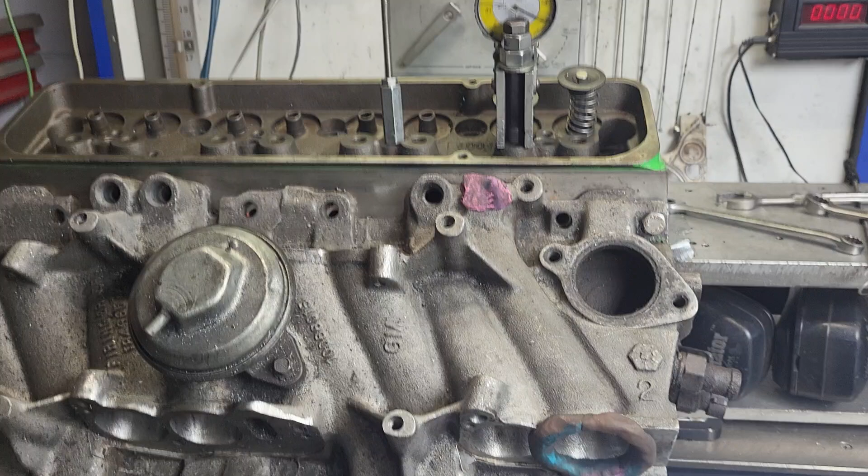All right, guys, as if I don't have enough on my plate, we're going to start a new project.

None of these parts are part of the project. This is actually my old 007 heads that are done up pretty well. They're 2.02/1.60s, fully ported, and pretty much ready to rock and roll.

This is a piece of a TPI project that never made it to fruition. The customer and I agreed on a price to do a set of heads. This base, he gave me two sets of runners, a plenum, and a throttle body, all to work up. I was about 100 hours into the project when he said he needed all his parts back. Oh no, I'm not paying you back then. So that isn't going to happen, that's why I still have the parts.

But I do have a TPI project coming. It's changed quite a bit from where it originally started. It started as a very low mileage '85 Z28, an L98, I think, or an '89, I don't remember.

In any case, TPI engine, 220 horsepower stock, something like that, with the 5.7 in them. He wants it to run way better than stock but pretty much look stock. When you open the hood, he wants it to look stock. I understand where he's coming from.

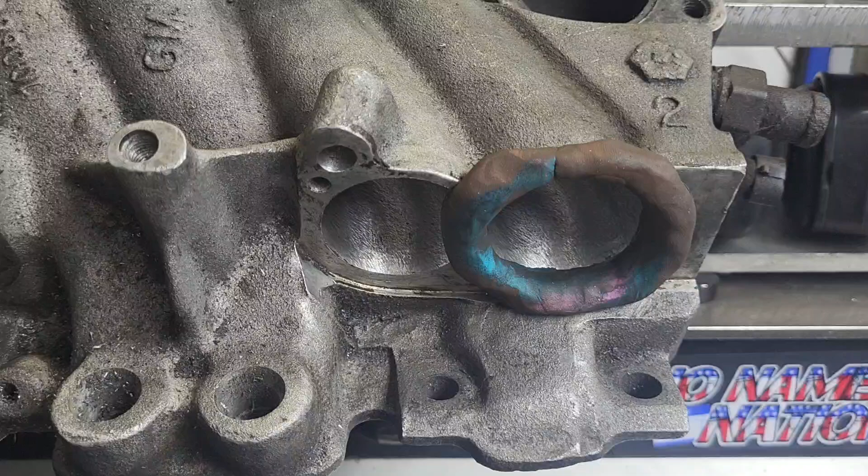And I'm going to show you what I did on this base. Is the base completely done? No. If you want to find out where this originally started, I did an in-depth thread.

Ported 083 cylinder heads, the TPI project. It's on Speed Talk, it's 24 pages deep, and it's pretty high tech. Even towards the end of it, Chad comes in, and he's building a very high horsepower TPI setup, but he's not using the long runners. It's really interesting what he does.

Basically what he does is he takes a set of 113s and he works them up, and he's driving it around, and it's good, but of course, what happens? You want more. So next, he's doing a set of super stock heads for it. Man after my own heart, really.

So without any further ado, let's take a look. What I did is I flowed the head by itself, and then I took this manifold and put the clay on it. The clay does not want to stay - what a pain, because there's not a lot of room. If you take a look at how they're designed, there's not a lot for the clay to bite on. So as soon as they start flowing, the clay gives you a hard time.

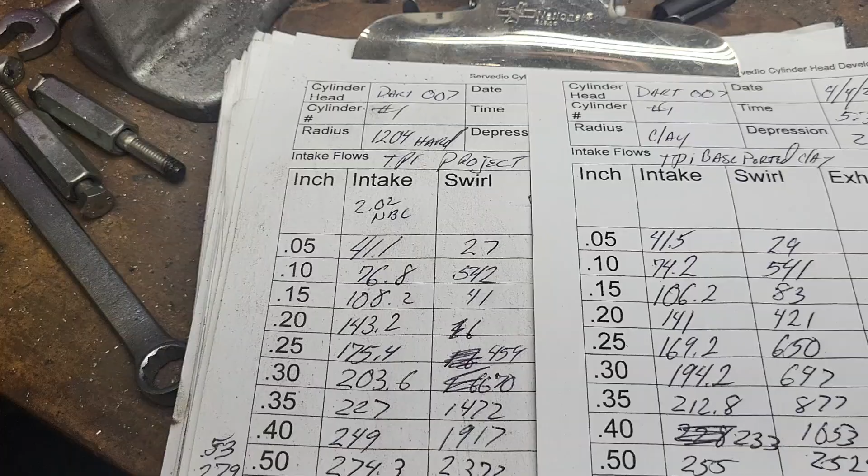Okay, the heads themselves - if you look on some of my very early videos, I did 4 or 5 videos on these Dart 007s. The only one you'd probably be interested in is the finalized one, which is where these guys are right now. They should be pretty similar to these flows.

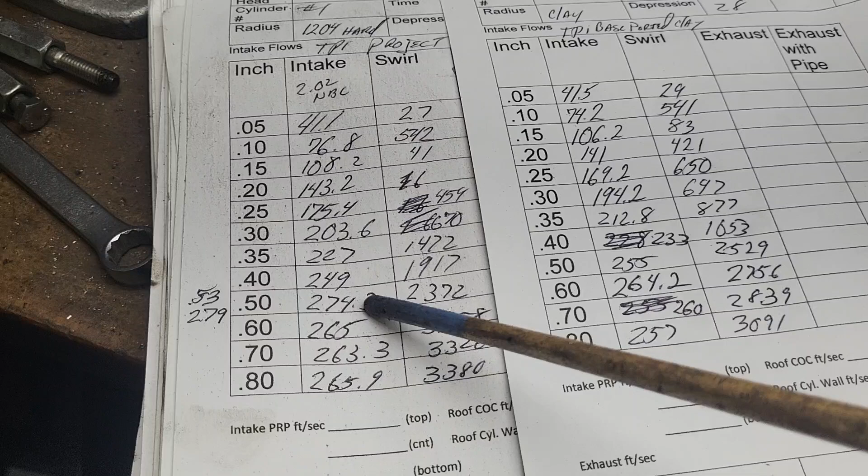In fact, I think it topped out at 274. I fiddled with it a little bit. At 0.53 it's 279. Now I worked on that because I was thinking of putting these on the old work truck. The old work truck has a 0.53 lift cam in it right now.

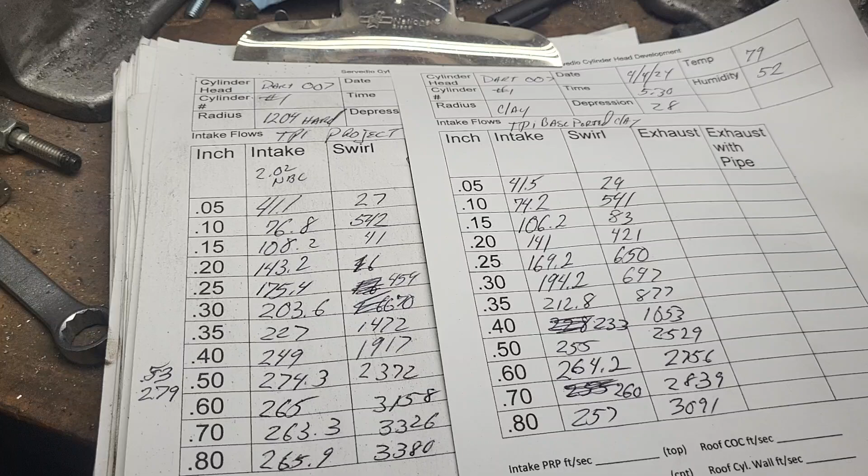So yeah, 280 CFM for a work truck with a 355 is pretty good. The heads that are on it now are 083s. They probably only flow 235 or something like that. They've been on there since the early 90s.

So in any case, we got a decent number at 300. We top out at 274.3 at 500. Right, we got a nice strong swirl curve.

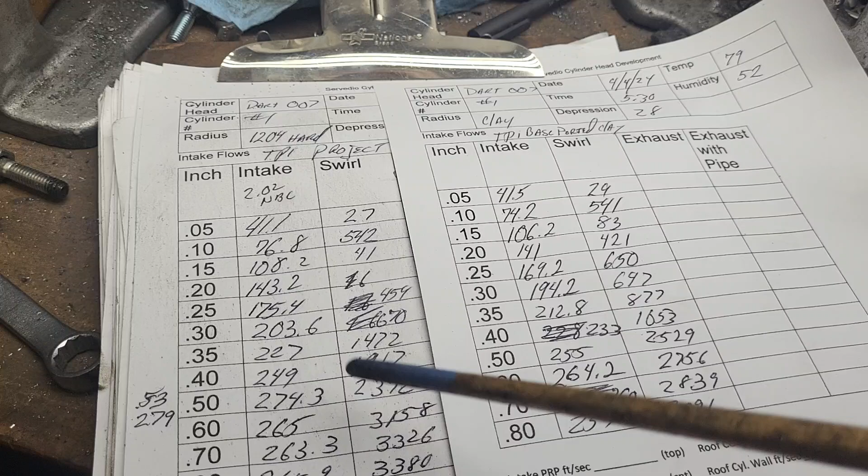Now the TPI engine will probably, depending upon how hot he goes - as it is, he purchased the 007 heads, they're on their way here. He picked up a nice base, I forget which one he told me he was getting, we'll see it soon enough. And he called my buddy Mark Vortec Pro about doing a short block.

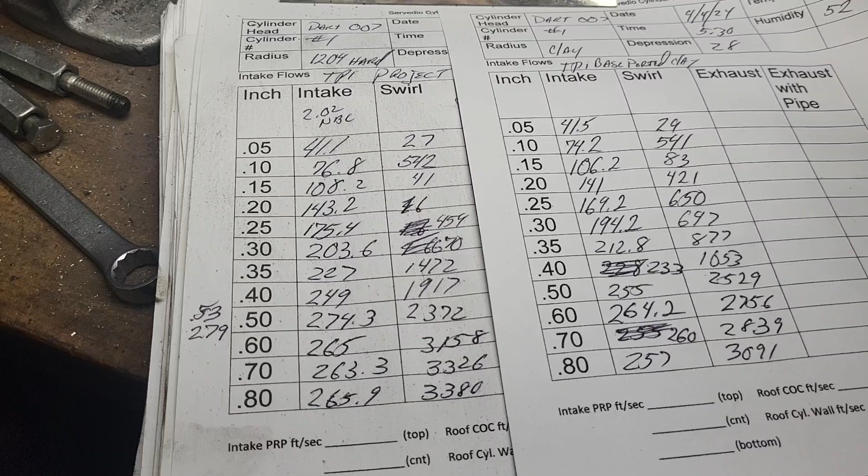So it may get boosted up with some cubes, which would be a huge help, make it a real torque monster. In any case, by the time we're all said and done, the thing's going to want to kill him every time he touches the gas, pretty much. Going to be tough to keep it out of the ditches. But that's half the fun, right guys?

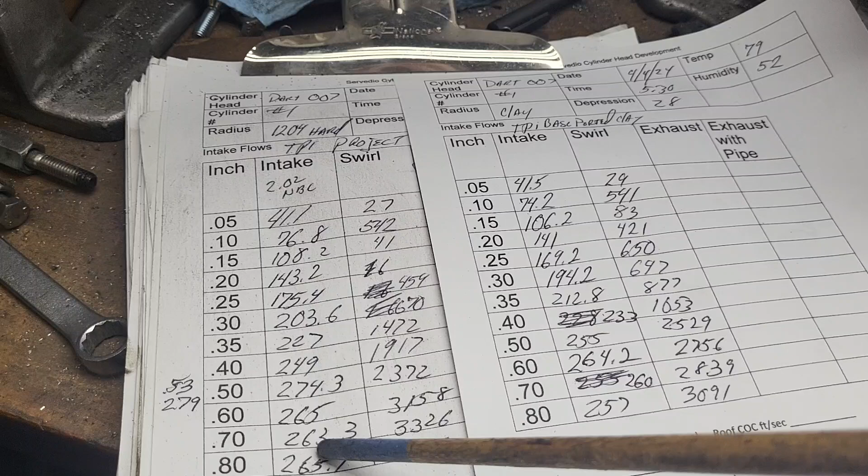Okay, so we did good as far as our existing flows. It was a 202 with no back cut - why? Because that's the first valve I found. The ones from the earlier videos had a back cut, so they're going to be a little bit higher in the lower lift ranges. Okay, so what happened when I put the base on?

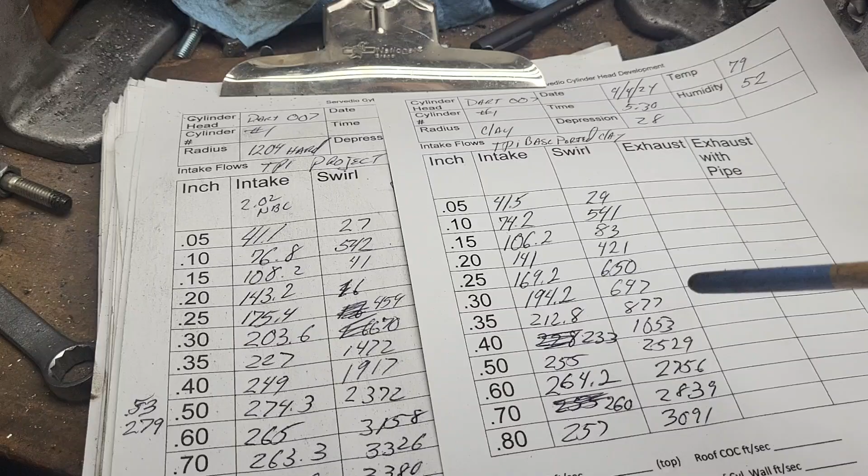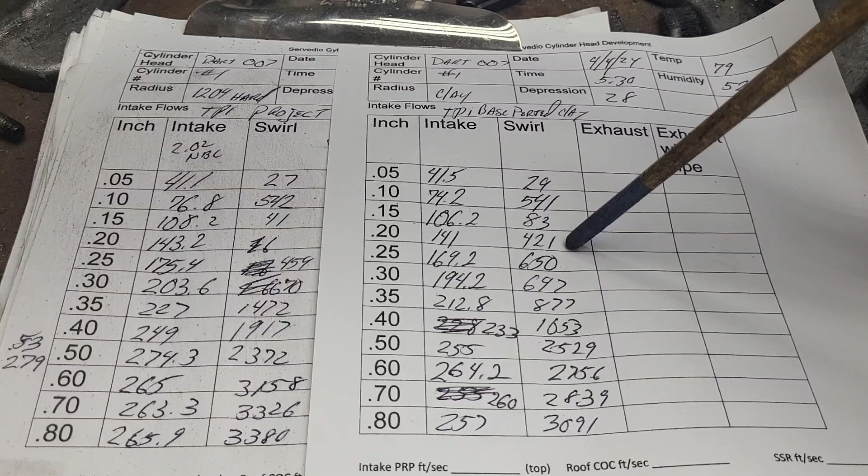Now I don't remember getting more than like 235 out of this base, but my memory is not perfect. And the 083s were only about, I think I was getting around 260 out of them. So these flow a little bit more.

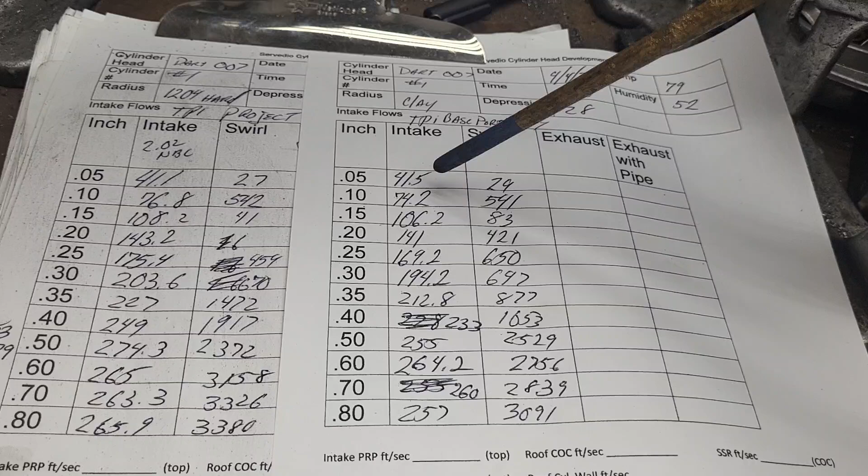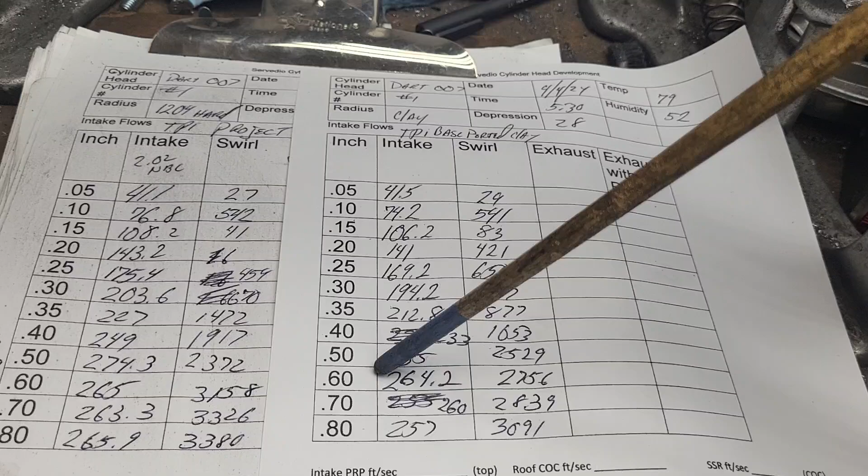And this is what we got as far as the base. We actually got a tiny plus at the very lowest lift, and it holds on pretty good. I mean, it's really not bad until about 400, and she starts taking a beating. But still, if that was our only restriction, we would be doing pretty good. We would definitely make some power out of that.

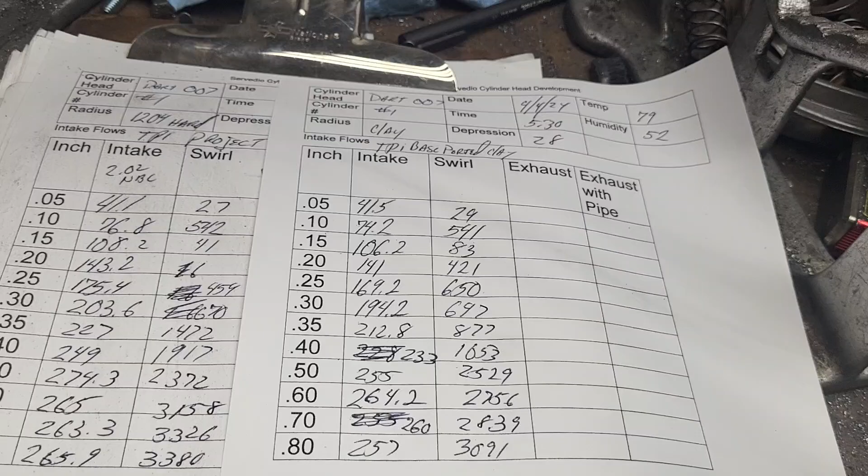Now what we're going to do from this point on, the next video I'll make, I'm going to add on the runners to these. Now I have two sets of runners - I have SLP runners that I cut in half, sectioned and ported, and I have a set of stockers. The SLPs, you would think, trounce the stockers, but that is not the case. So we'll do that, but that's not going to be today.

I think I'm going to pop these off and give you guys a quick look at the intake and the head.

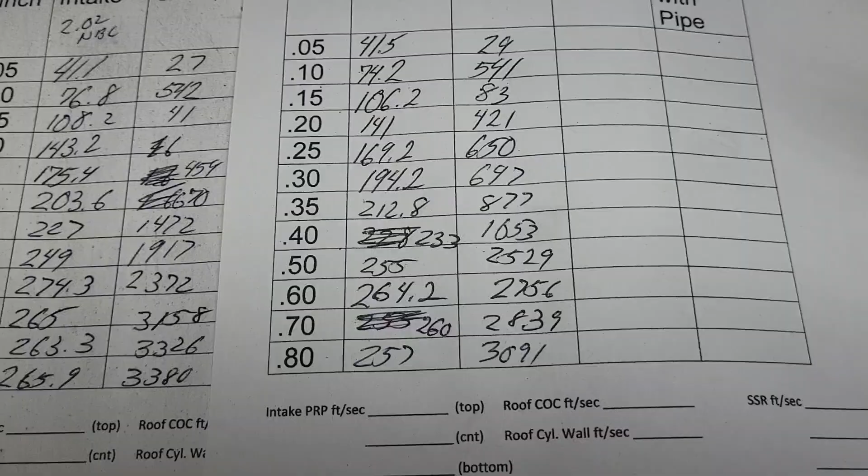You know what we should do? We should discuss the swirl. Okay, go back and forth a little bit.

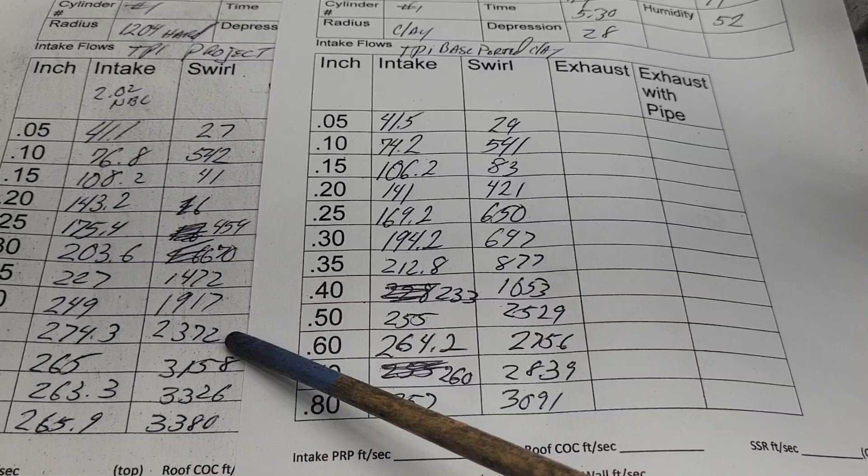Yeah, the base does, it knocks us down in this area, but it actually - you got a plus there, you got a minus there, you got a minus there, you got a minus there.

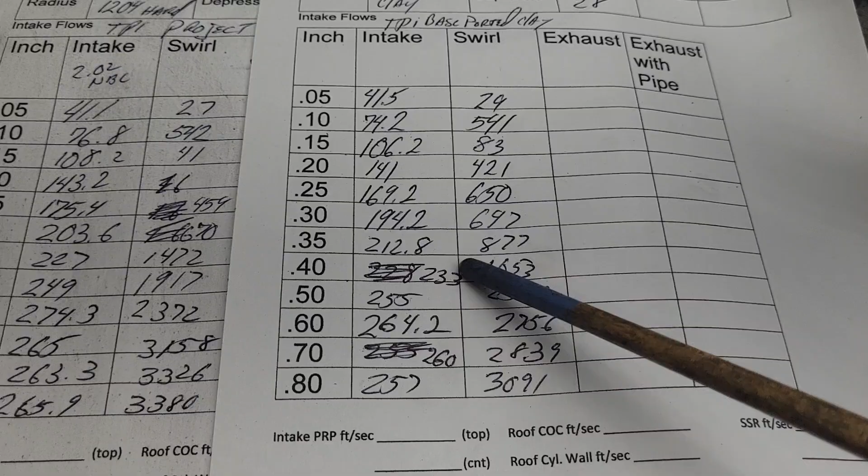So what's interesting about these is, in reality, what they did is they took the - I don't know exactly what year they came out, let's say 69 DZ 302 cross ram. It was originally made by Offenhauser, I think. They took that design, but they added on these long runners and made it port fuel injected, okay? But it's got the same type of curved runners, right? These curves are relatively steep, okay.

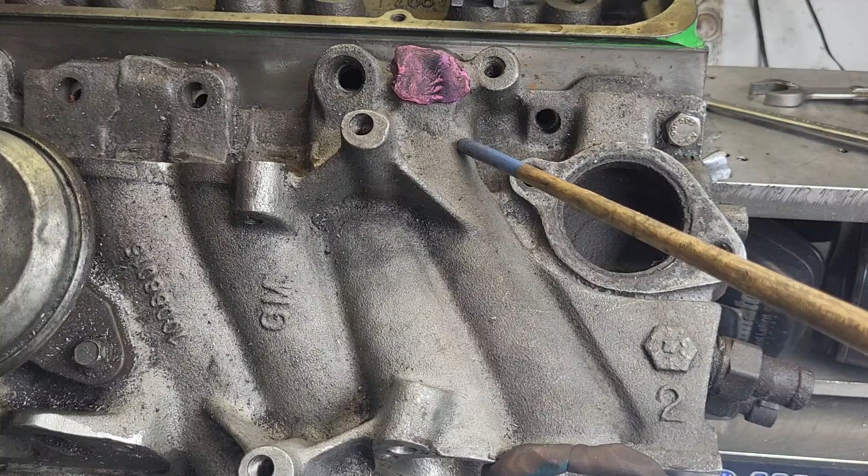So I remember my pitot was long enough to get almost all the way down to the end, and these are high speed right about here. Okay, so we can give it some more area there and calm it down a little bit. But we'll see how that goes.

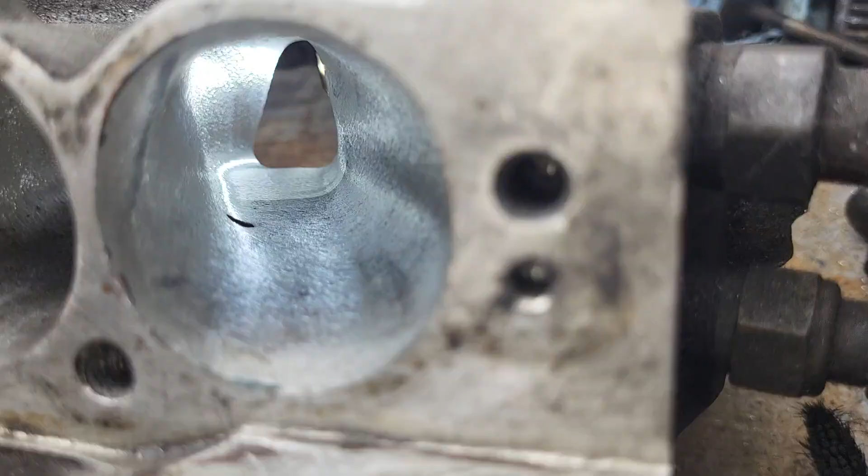Okay, you can see down the runners, they don't have a smooth finish on them. I was still doing my airspeed testing when this project died, so it's a rough surface, which doesn't seem to hurt it that much. In fact, I seem to remember I did an experiment with a smooth runner, and it was almost identical.

Okay, but you see how it's coming. It's coming from around, and then it turns rectangular as it goes through. Now what I need to do is go from one end of this to the other end with the pitot and see what the airspeeds do.

Now these are nowhere near stock shape, okay? They're quite a bit different than stock shape.

If somebody knows what those holes are, I don't know if that's EGR. I don't know what that is. It's not in every runner, I don't think. Is it? Those are, yeah. Oh no, it is on every runner. Okay, I think those are EGR ports, that's what I think they are. But if somebody knows, let me know, because I have to know everything.

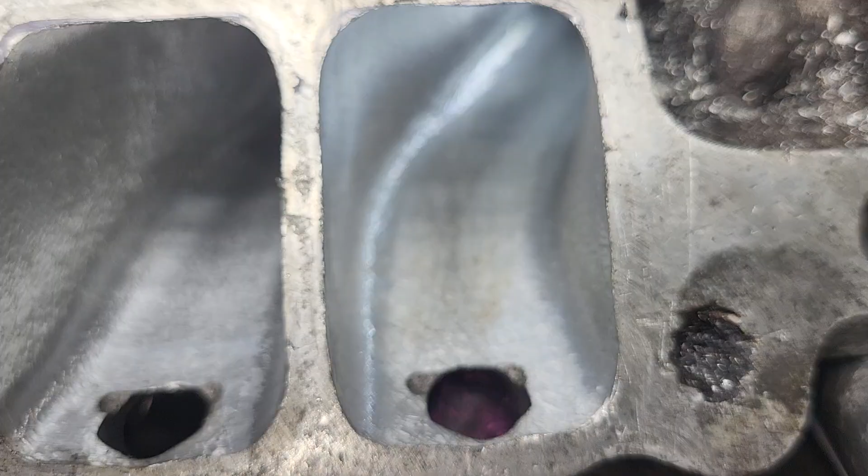Let's flip this over and see what we can see. Okay, it's still a 1204 gasket. If you take a look, it's not even perfectly gasket matched, because it was still in the development phase.

These turns, as far as I'm concerned, actually need extra area to slow the air down a bit and make it easier for them to turn. If you think that is wrong for a long runner design, let me know, because part of the problem with a TPI project is usually the runners are the restriction. So we're going to have the highest speed air through the runners, and then it's going to knock down a little bit in the manifold and then knock down again in the heads.

In reality, I would like it if it was just the opposite, more like a Victor Jr., where it's relatively big and tapers down until you get right to the valve seat. That would be ideal. You can't do that on a TPI, okay? It's not going to happen.

Now, they do have... TPIS has a very big TPI system. I think it flows like 300 CFM, but it seems to still peter out at less than 6,000 RPM. We're going to do some airflow work on this, and we're going to try to figure out what we need to do to make this a torque beast and keep it all around. I'm going to guess around 6,000 RPM.

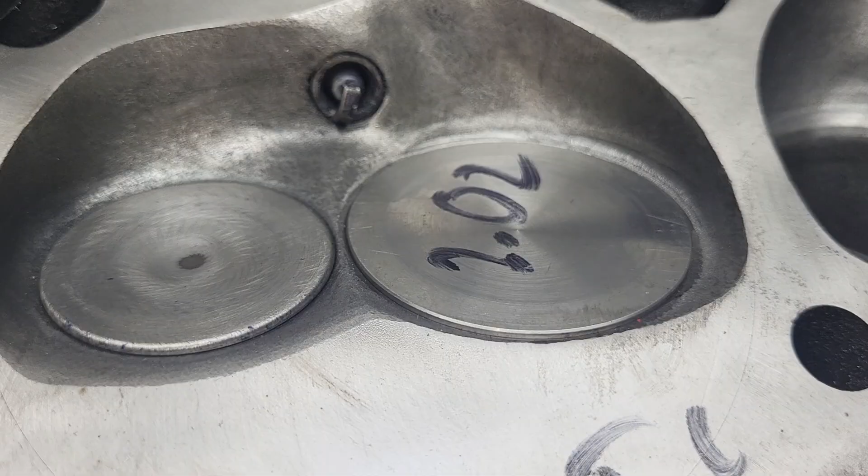Okay, you guys aren't used to seeing my chambers not all covered in blue. I'm not doing that on these because I know what they look like. They have a pretty good handle on the Dykem.

Now this, I can see the chamber isn't completely finished. I could see on the edge of that valve it could use a little more blending. Same with this one. I just grabbed one head and some valves, and we did a baseline and then threw the base intake on.

Let's take a quick look on the inside, and I'll tell you what I like and don't like about these heads. If you look carefully, there's a little bloop still in that bowl, so I obviously used this for testing at one point. Like I said, it's a 202. Does it look like it's got the world's most fabulous valve job? It's relatively thick, I'm sure I could do better than that, but in any case, it gets it done.

Now it's just a 45. The exhaust I actually like on these. It's not even polished, right? It doesn't even have a polish on it. I didn't do the exhaust flows, but this little exhaust port with a 1.6, and not a huge amount of work, flows like 211 I think it is without a pipe, and way more than that with a pipe. I think it was 240. It cranks. What's nice about it is it's got a nice deep bowl on that exhaust and a high short side radius, which is really nice.

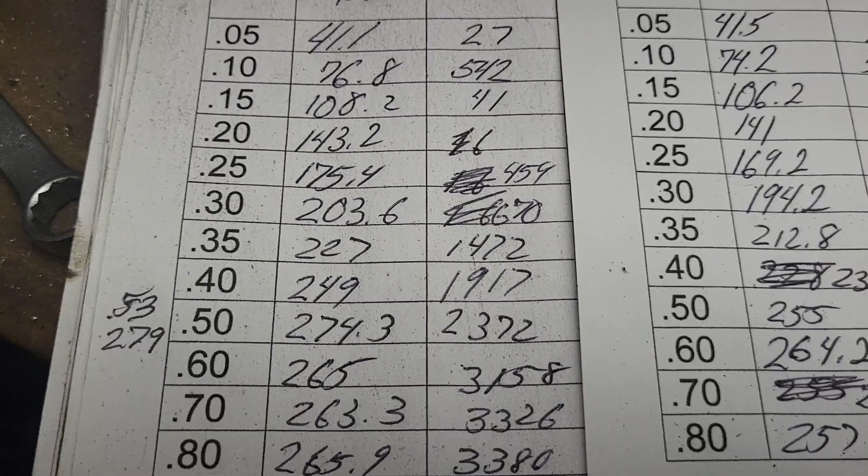Okay, nothing fancy. I left the short side radius quite high. Yeah, I made it wider, and I worked on the airspeeds. Remember, when I did these, I was thinking about using them on my truck engine, so I wanted the mid-lift curve really good. And if it died over 500, big deal. It's only got a 533 cam. And it's a truck. I want the mid-lift numbers the best I could.

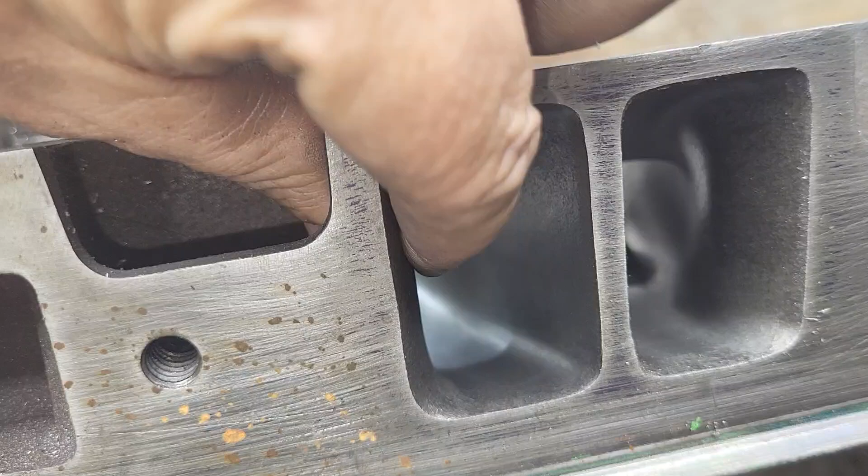Now, one of the things I don't like about this head is the way they did our pinch, okay? One of these is thin, and the other one is thick due to core shift. Well, I don't know if they're all like that. Maybe just these heads are. But it definitely limits our area.

You know what Rob would really like? He'd really like to know how big I made these. So let me get that and put that down for him, and he can see it.

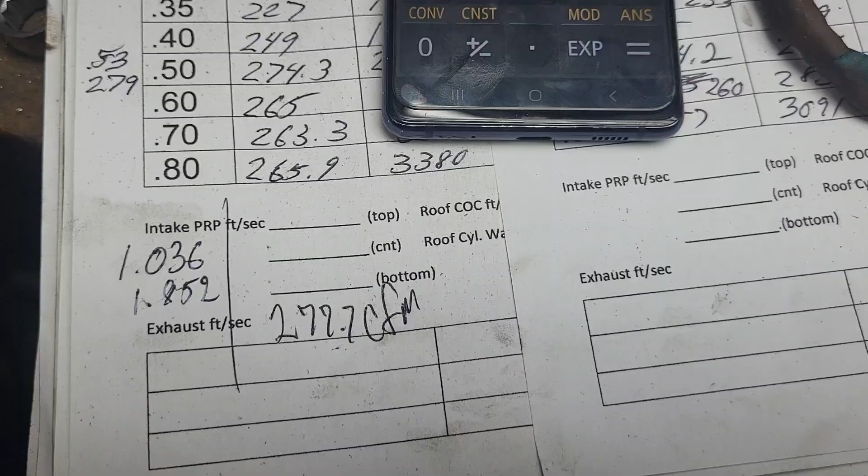All right, guys, some quick math, some quick corner radius. It may not be exactly perfect. I'm beat, and it's a long video already, but it calculates up that pinch should flow 277.7.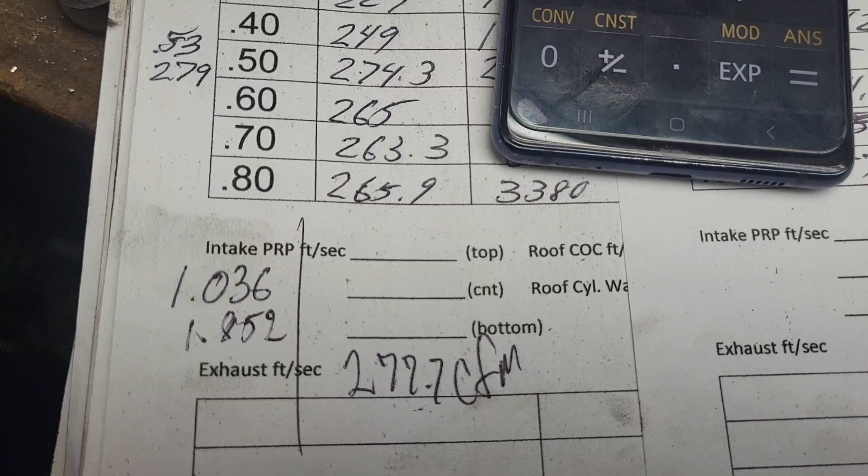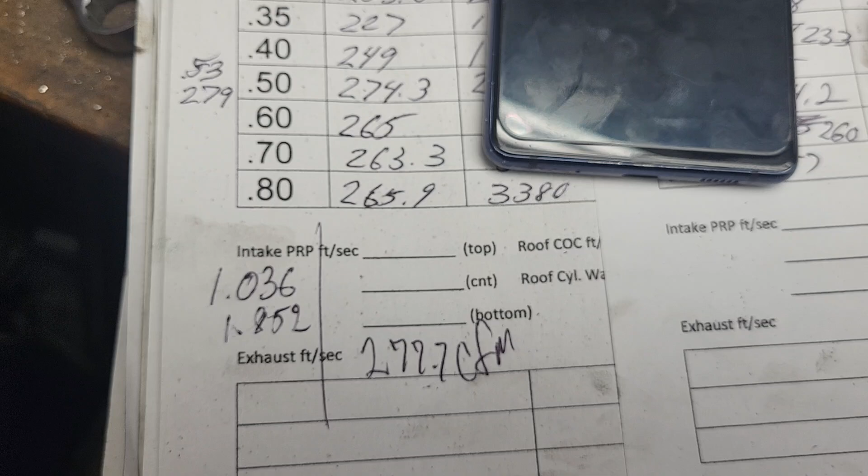Think that's by accident? I don't know. Could I get more area out of that pinch? I probably could. But you got to remember where I was working on these. I wanted to put them in my old work truck, and it was going to get a dual plane on it, so kind of a waste.

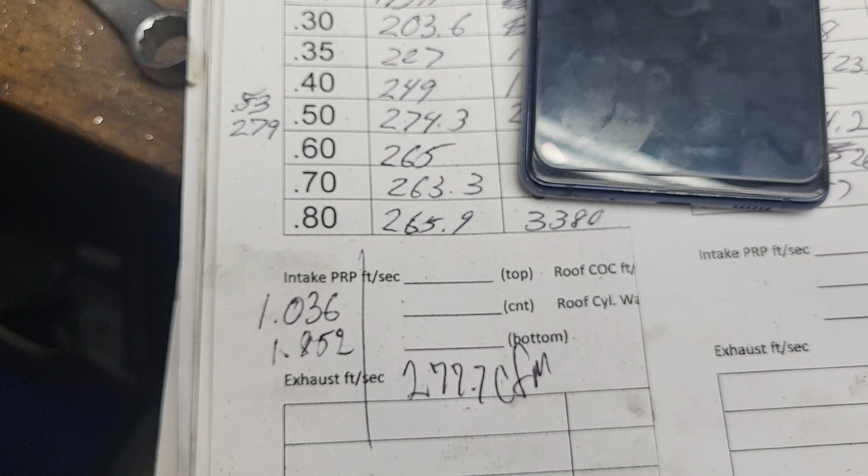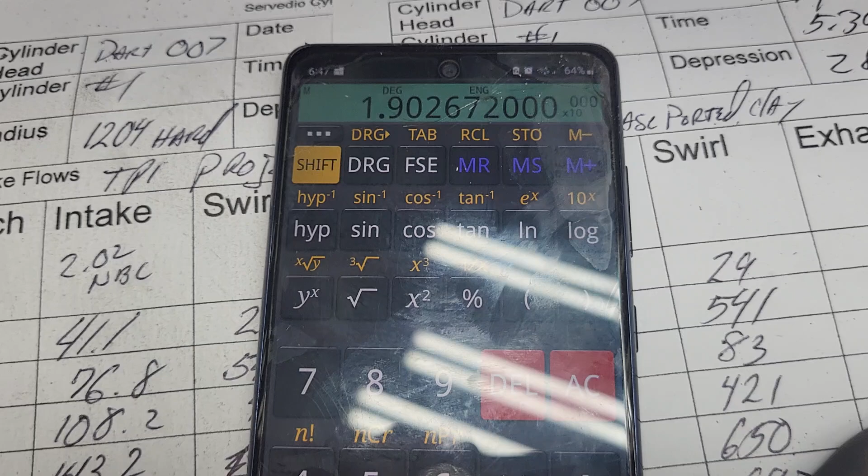In any case, you know what we should have done? Hold on. Okay, that's all the area we have, unless I goofed something up. 1.9. I know Rob is figuring on a 2.08 minimum cross-sectional area to do what he's got to do.

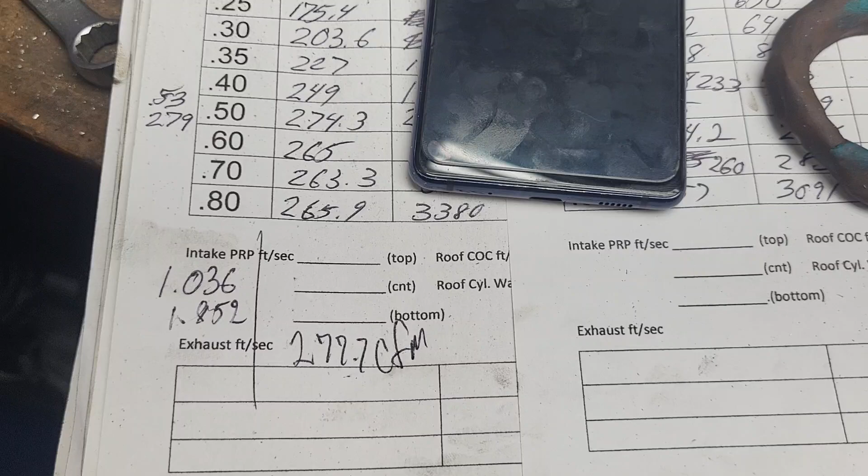But as we know, if you shape a restriction the right way, you can actually exceed 100% efficiency. But we're not getting into that tonight. I'm hammered.

You know, I do my angle on the exhaust there. I change this a little bit, but not a whole lot. I do take some area out of this corner because, believe it or not, you get a lot of flow out of that corner. In any case, almost 19 minutes.

Give me your opinion on the TPI project as it sits right now. Now remember, I'm doing this just for information. I will see if I can bolt all this stuff up with the runners and the plenum. I got to take all that stuff apart. I really need to clean it all. What a mess, because it's been sitting around for quite a few years now.

And we'll get some numbers, we'll get some numbers of it all together. Now remember when I did the Speed Talk thread, I was using 083 heads, which didn't flow as well. Okay, these flow quite a bit better. It's a better design head, let's face it.